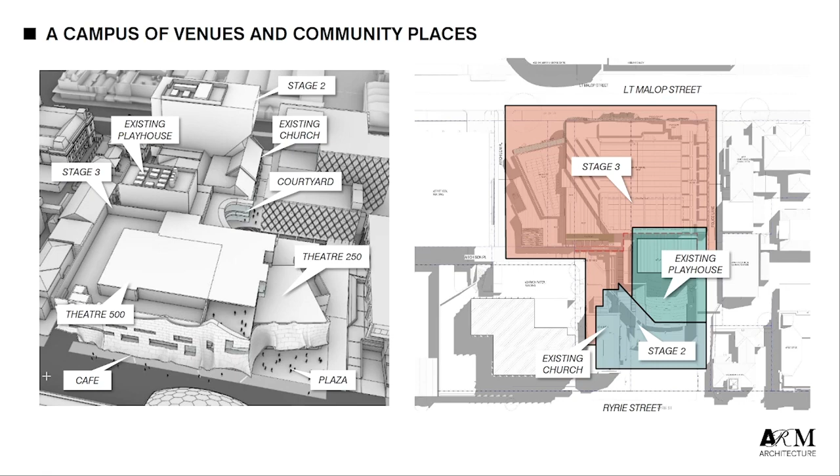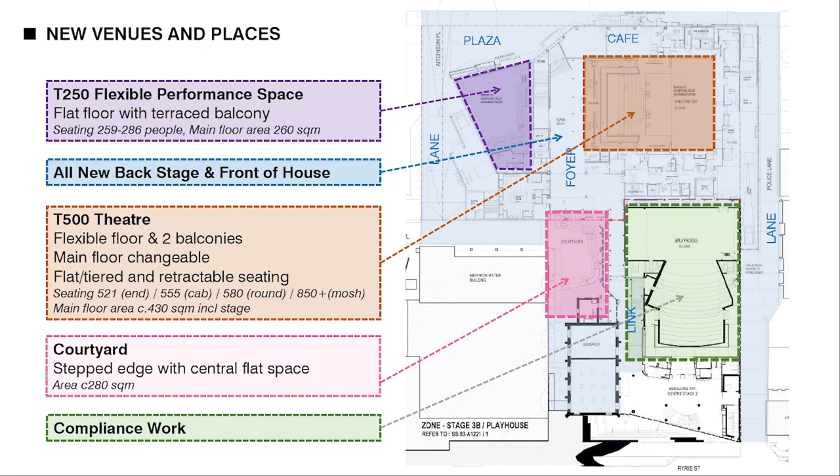The project was to provide two new theatres, upgrade all of the back-of-house, and do compliance works in the existing theatre. We also explored what the church could be used for, and then later on, through some advocacy work, the lanes and exterior spaces as well. They weren't actually part of the original project.

The site itself has been a part of performance and gathering for 40,000 years. This little area is actually a basin with a number of creeks running into it, which is a very important part of Wadawurrung culture and the location - in fact that's why the park is there, because it was essentially a wetland.

The old church and the original Masonic Hall, from the 1880s, burned down. They built a new hall in 1920, which is actually still what the playhouse is - also very important in the history of Geelong. So the significance of the place really directed us in how the design would be done.

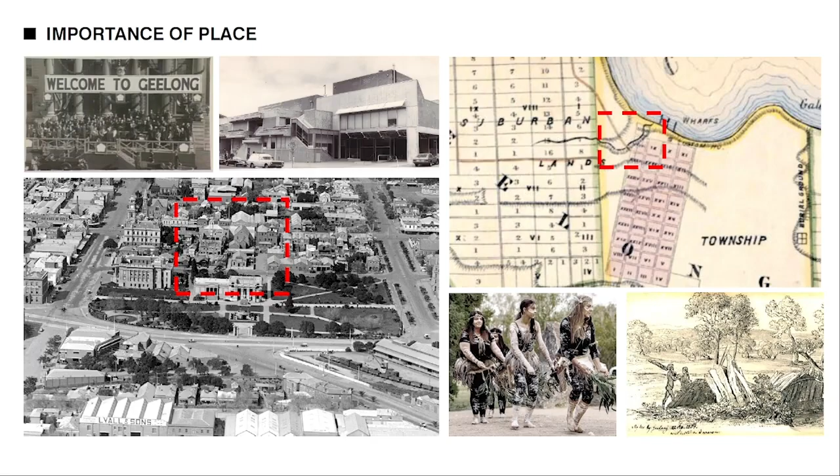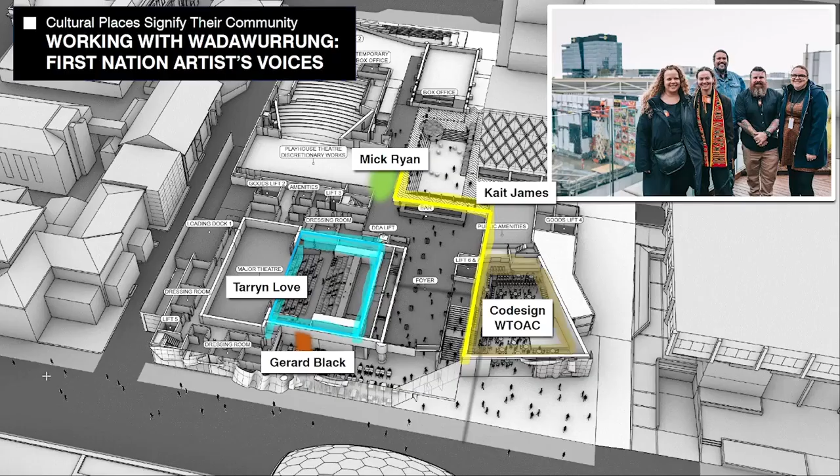From very early on we worked with the Wadawurrung and talked to them about the thematics for the overall design, and they came up with this idea for the building: the rise of the ochre country down at ground level, then the mid-levels of Moonah Forest, the upper levels of Sky Country, and then the very top Night Country. Those thematics and narratives we then turned into aspects of the building.

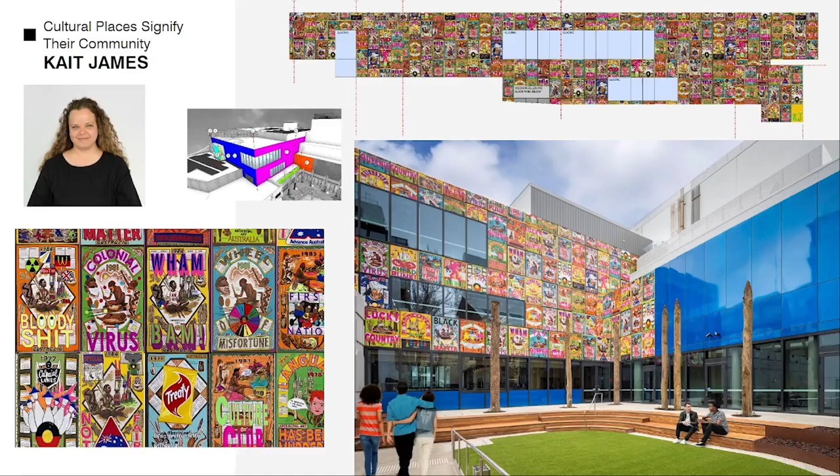We also ran a process of working with artists from very early on, and the artists essentially made the design - we then added the technical skill to turn it into physical things, like Kait James' amazing works that were used as the exterior cladding.

She is a fantastic artist. The interesting thing is, as a Wadawurrung but also a contemporary artist, we were really keen on getting a contemporary voice in, as well as the continuous narrative of the location. That top drawing is us trying to work out how to lay out those panels.

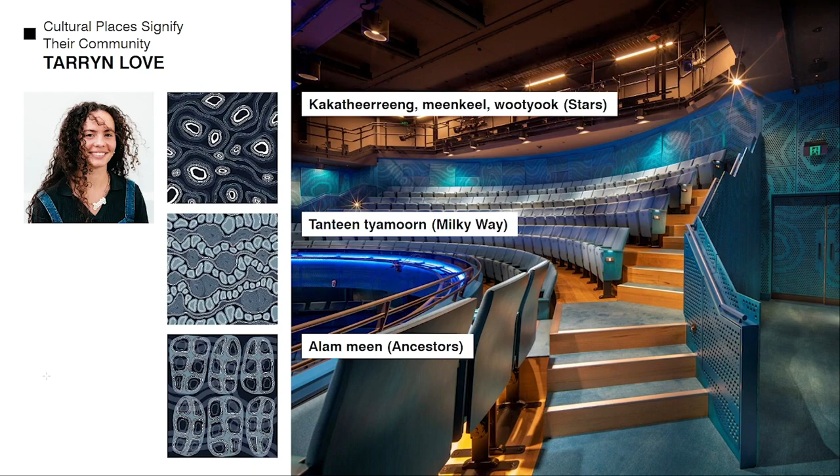Tarryn Love, again a Wadawurrung artist, did a more traditional narrative about ancestry and the continuity of ancestry, which were then turned into the panelling. She'd never worked at this sort of scale before, so she came into the office and worked with us to turn the whole interior of the 500 Theatre into a series of statements about ancestors.

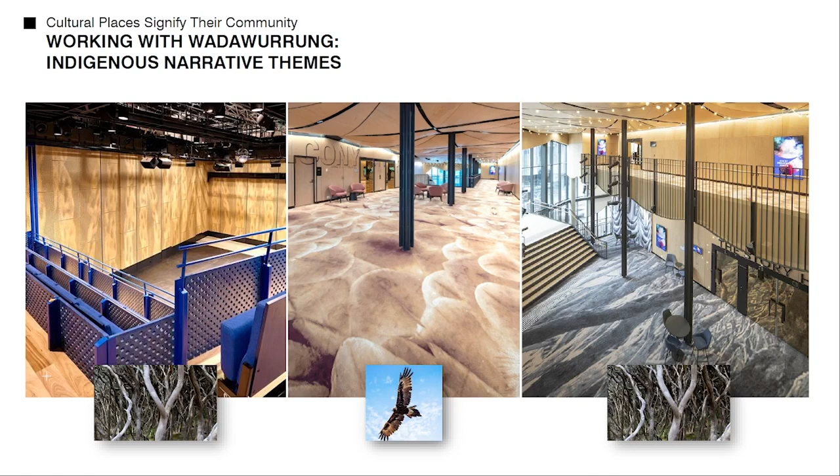We also worked with the Wadawurrung to establish these themes of the Moonah Forest in the panelling, in the carpet, and in other aspects of the design.

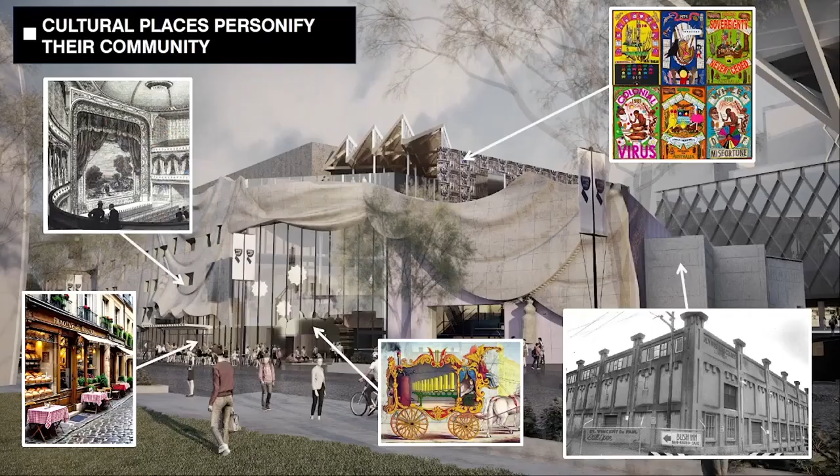The other part of the narrative is the tradition of performance, and the building as a performance space as part of Western culture, but also the diverse aspects of performance - not just theatre, but our experience of performance as circus, the great tradition of the boxing tent in Australia, or the mosh pit. All of those things are brought together into the design.

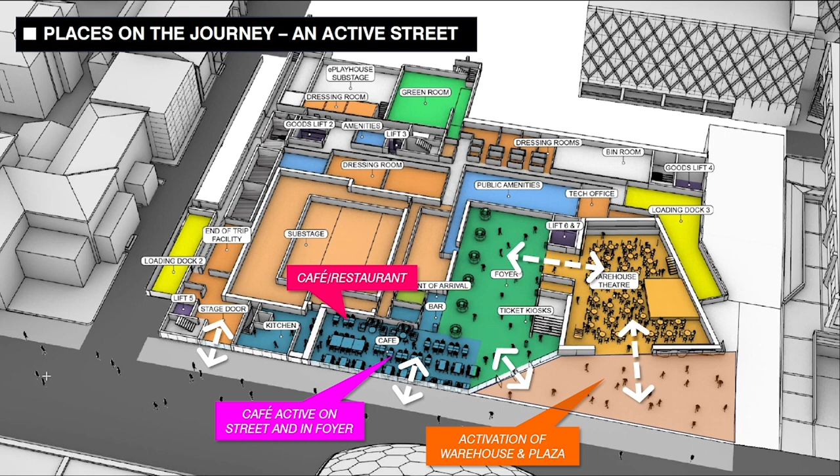This is a quick demonstration of how those things are assembled - the idea of the whole design being a campus, activation of the street level and a welcoming nature, so that when you come in, the foyer is actually the cafe. So when you walk in, you walk into an active space, not just a dead foyer.

These spaces are articulated through the walk - the foyer could be used as an RSL maybe, and they also had part of that brief where they wanted an area as an exhibition and gallery space. So the foyer is actually just split like a set - this is one set, and you walk into the other set.

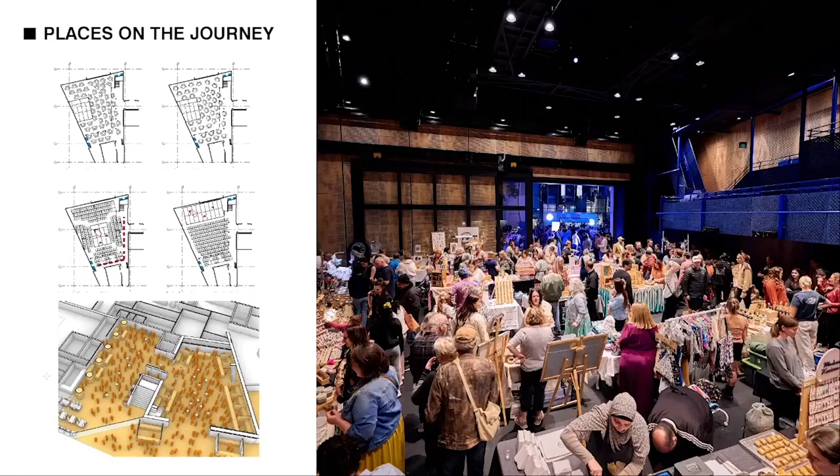A very flexible 250 seat theatre, a different sort of theatre like a warehouse, which you can see used as a market. It's also openable to the street through these huge doors - there's a black door and a glass door, so you can either see in or open it right up. That's it being used as a market, and lots of different ways to lay it out - that's it being used as a gallery.

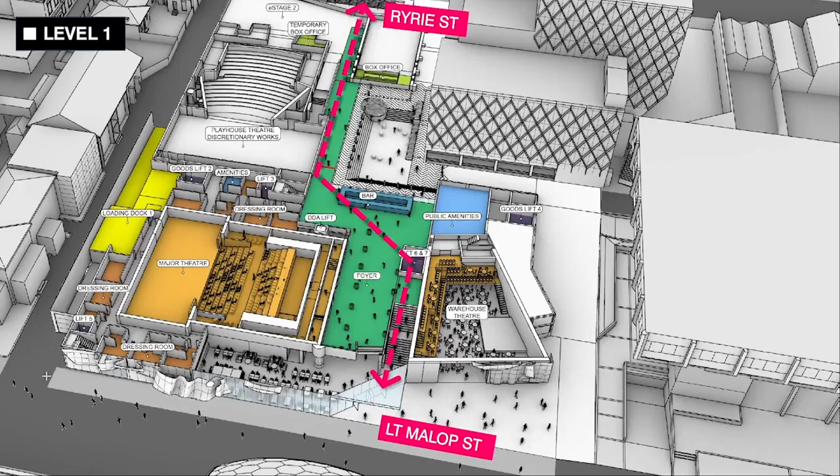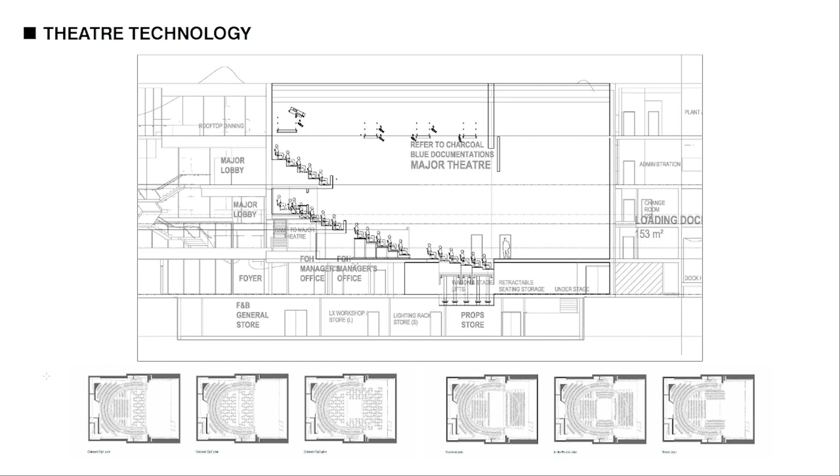The theatre is also incredibly technical in terms of its flexibility - it can be used as a 900 person mosh pit or a 500 seat ordinary theatre.

Back of house has its own narratives around the green room, and our non-gendered toilets. That was quite a controversial thing, and how that would work both in layout and also where you wash your hands as a public space.

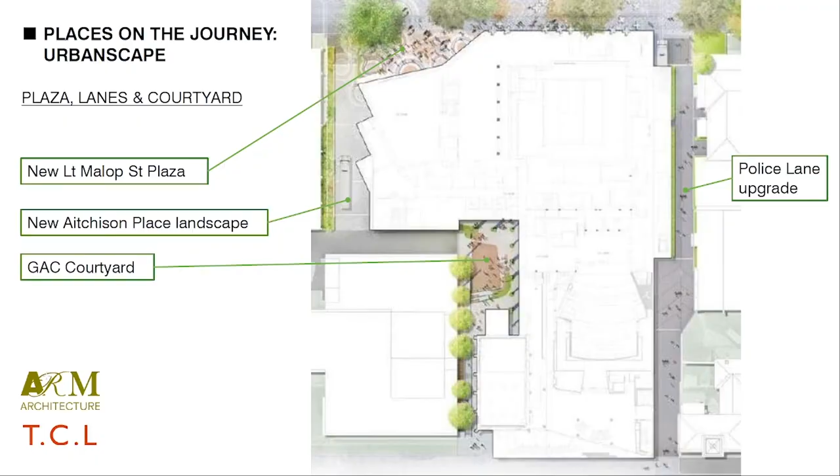The link through to stage 2, the Hassell section on Ryrie Street, and the streets around - there's that opening up of the front for a performance plaza. The streets were upgraded; Aitchison Place is a new street that was built, actually moved from the middle of the building to the outside of the building.

In the courtyard we even got some old pylons to pick up on Geelong's waterfront history, and got barnacles on them - if you go there, you'll still see the barnacles. And Police Lane, even to the extent that there's a loading dock there, to account for the building being seen in the round by pedestrians walking through Ryrie Street to Little Malop. That upgrade was done with TCL and with the Wadawurrung people.

We just took old posters from GPAC and put them on the wall.

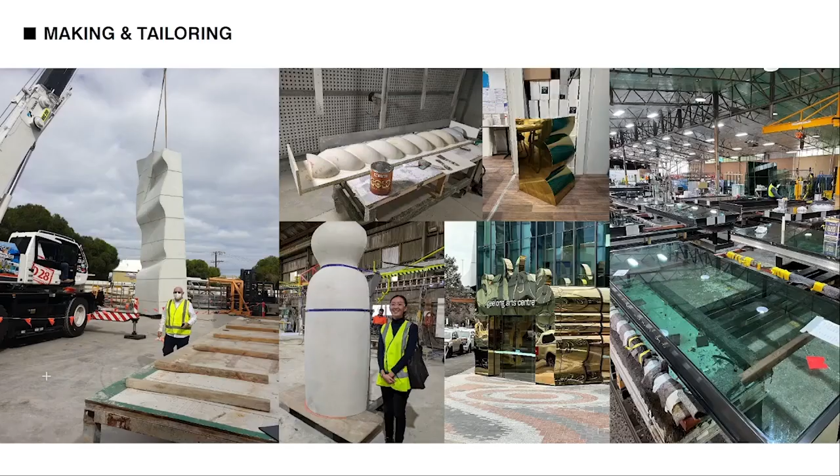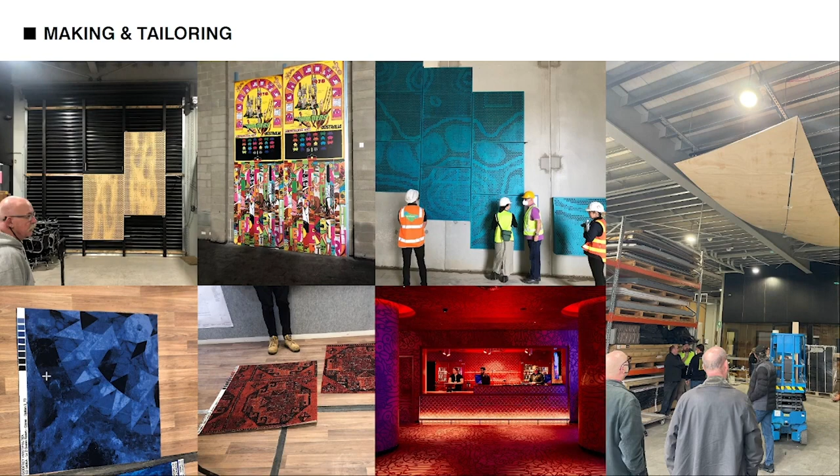Making all these things, we used local glass, the skills of the GRC, and we even worked with Godfrey Hirst to use their carpet making - we designed the carpets and essentially taught them how to do pattern carpet, which they didn't normally do since they just do commercial carpets. Likewise with the Werribee joinery.